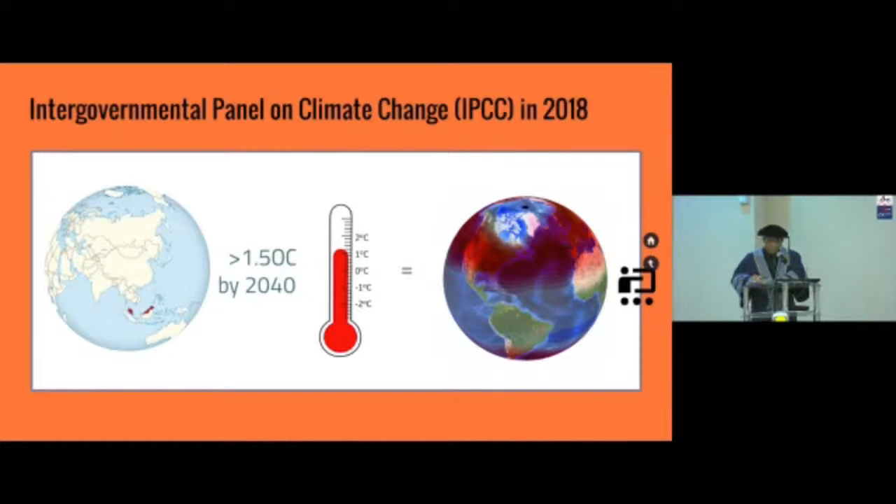That is why the Intergovernmental Panel on Climate Change, IPCC, in 2018, with 90 climate scientists from 40 countries over the world, concluded that global warming must be limited to 1.5 degrees Celsius by 2040. If not, we will face devastating effects, especially on temperature rise.

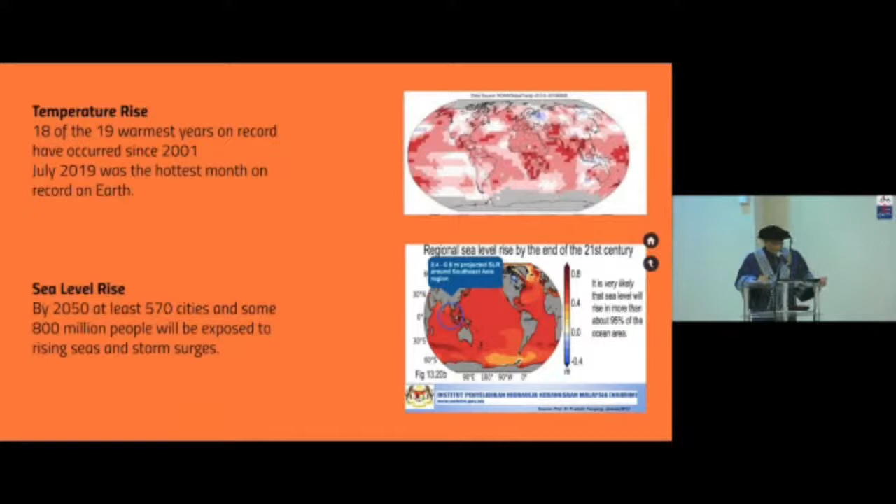When the temperature rises, the water will expand and sea level will rise. We will face extreme weather, and we will have lots of climate migrants. Of course, this contributes to poor health.

Because of heat exposure and children's undernutrition, we have diseases related to climate change. And then we have water problems.

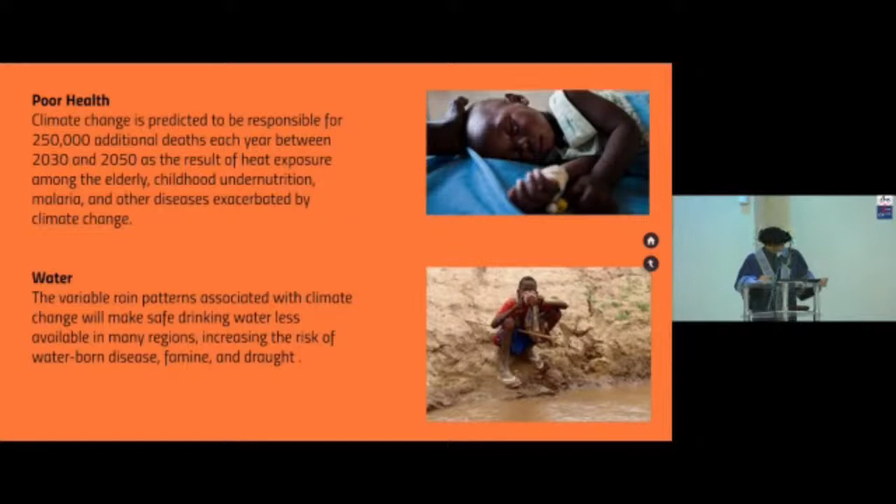Air pollution is a normal phenomenon now, which is why we are trying to promote the use of electric cars. And of course, related to climate change, we see mass extinctions and ecosystem collapse.

Another effect is changing agriculture conditions, because of the heat being generated in some areas. In the past 30 years, developing countries in Southeast Asia, including Malaysia, have witnessed the biggest number of natural disasters, with more than 90% related to climate disaster.

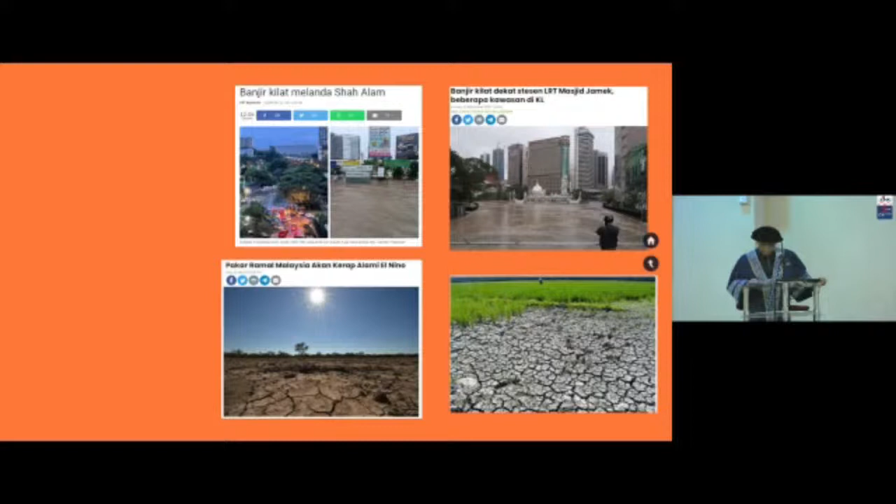In Malaysia, flood incidents have increased over the past 20 years, with losses exceeding 8 billion ringgit. We have had floods recently. The effects are felt by all people, but most severely by the underprivileged, low-income families, and farmers.

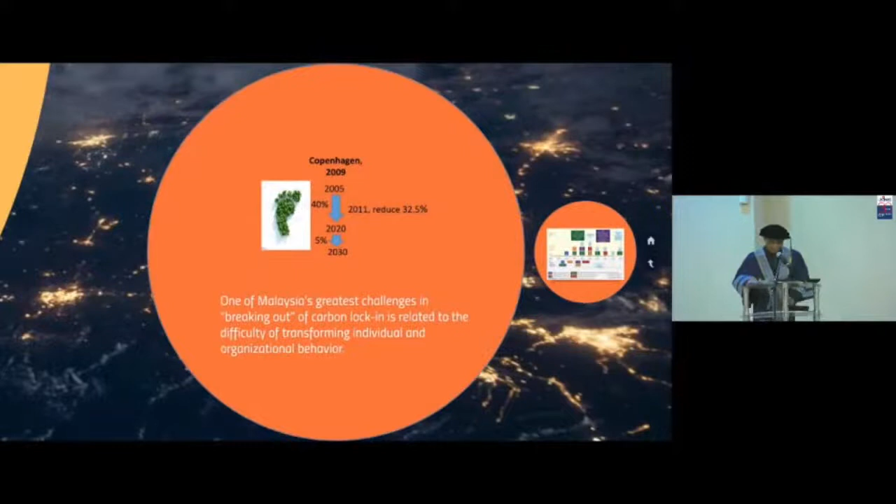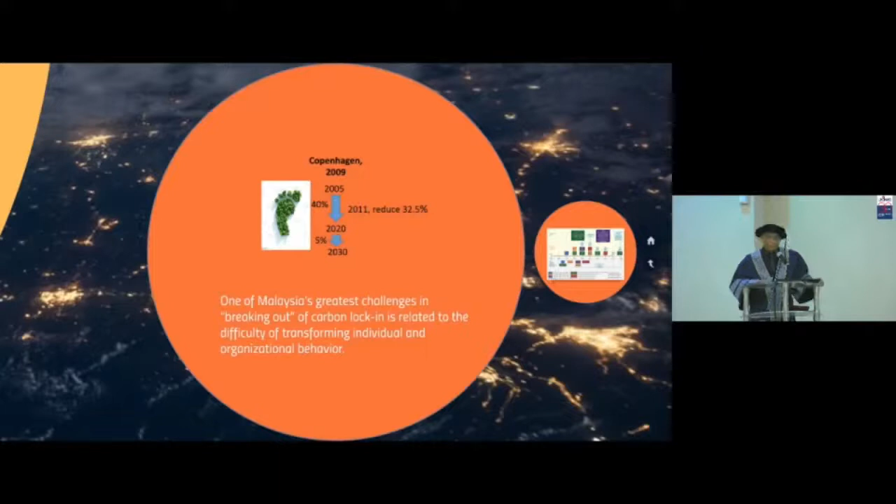So what is Malaysia's action plan in handling this? In 2009, our 6th Prime Minister, at the United Nations Climate Change Conference in Copenhagen, promised to reduce carbon footprint emissions by 40% by 2020 compared to 2005 levels, and later a further 45% by 2030 compared to 2005 levels. Now it is 2022 - what happened by 2020? Did we achieve that 40% carbon reduction?

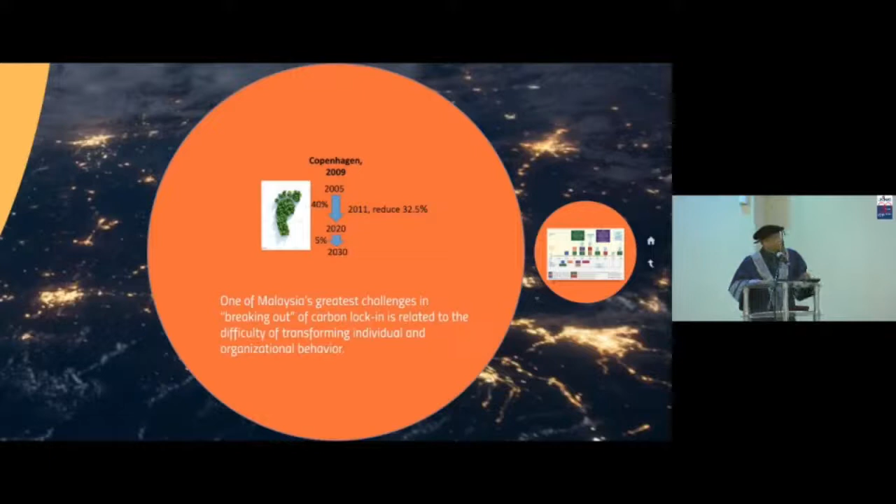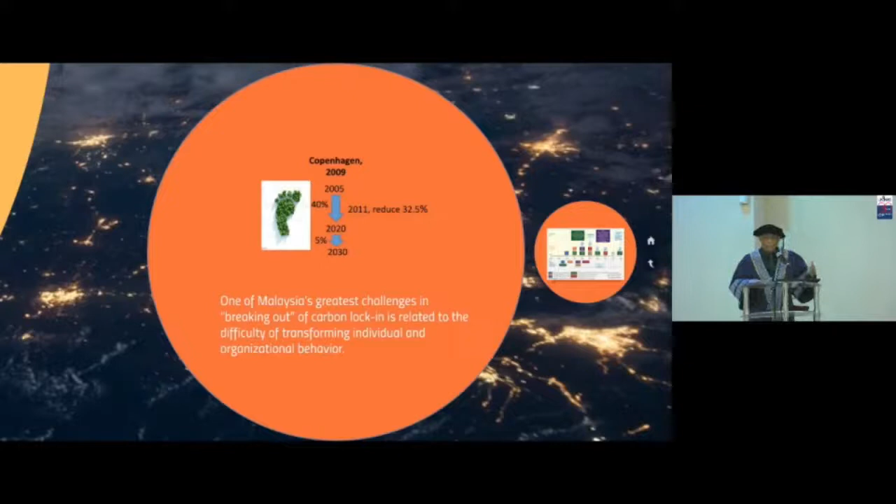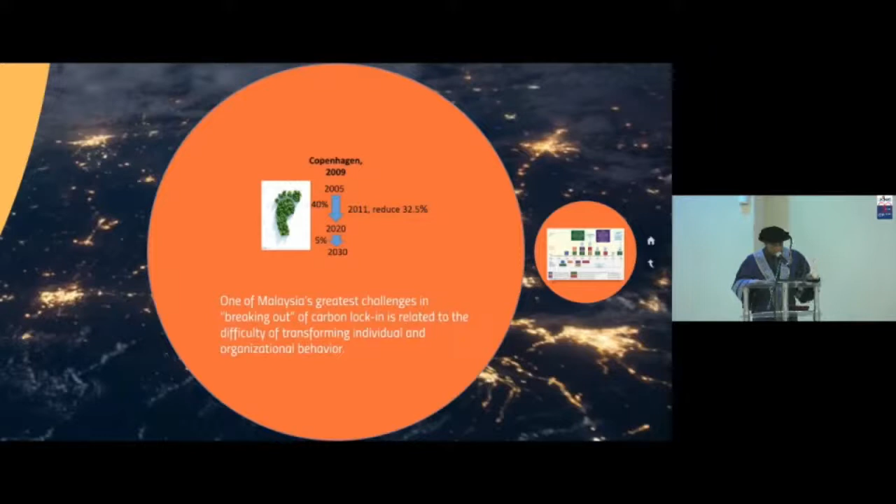One study found that by 2011, we managed to reduce 32.5% of our carbon footprint. After that, they had problems getting the information. So one of Malaysia's greatest challenges in breaking the carbon lock-in is related to, number one, difficulty in transforming individual behavior, and number two, organizational behavior. We have problems changing that.

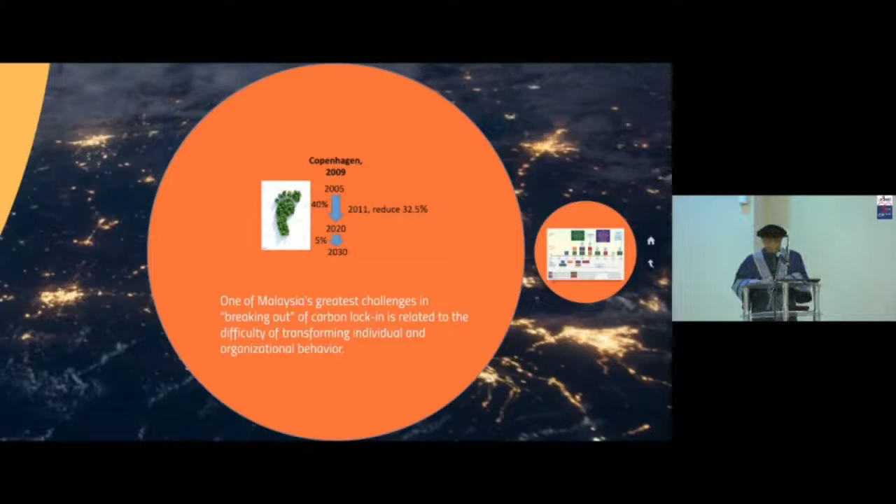Malaysia made green technology a mainstream ministerial portfolio in 2009, followed by the launch of the National Green Technology Policy in 2009, the National Renewable Energy Policy in 2019, and the Generation Development Plan to 2020. We have promised another bold pledge: Malaysia will achieve net zero CO2 emissions by 2050, with 73% of energy production based on renewable energy.

How about Sarawak? What did we do in Sarawak? The Sarawak Post-COVID-19 Development Strategy 2030 was launched in July 2021, specifically to ensure a clean and healthy environment for all, by having policies on sustainable forest management, as well as adopting new technologies and innovations to support Malaysia's commitments.

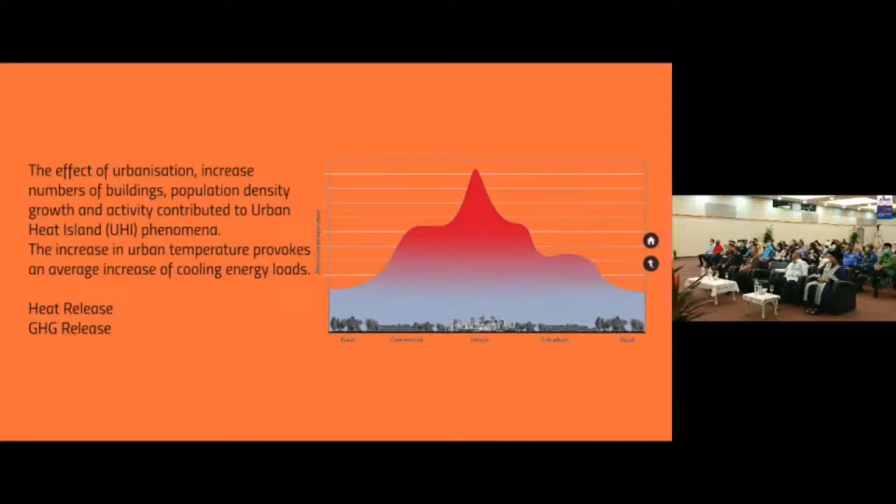I learned this from Prof. Julaihi last time on this one, right? And I keep digging what's the information about urban heat phenomena. So because of heat release and GHG release, the increase in urban temperature provokes an average increase of cooling energy load.

Okay, SDG related to green building that I'm trying to elevate, the name green building, right? Actually, green building or green office, they comply to SDG goals. It's 9 SDGs out of 17 SDGs. Okay, 9 of them comply within the needs of green buildings.

SDG goal number 3, good health and well-being. SDG goal number 7, affordable and clean energy. Green Office complies to goal number 8, decent work and economic growth. It complies to goal number 9, industry, innovation and infrastructure.

SDG number 11, sustainable cities and communities. SDG goal number 12, responsible consumption and production. SDG number 13, climate action. SDG number 15, life on land, because it enhances biodiversity, it saves water resources, it protects forests. And also the last one, it complies to SDG number 17, partnerships for the goals.

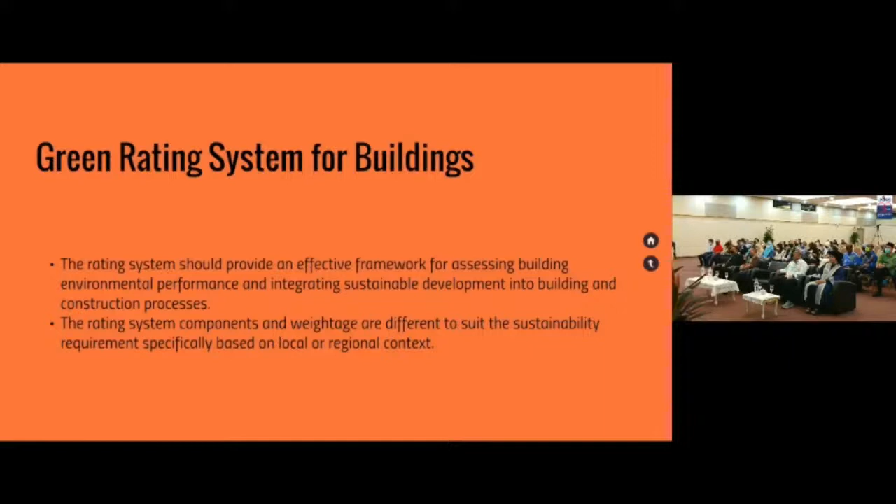Okay, when we have sustainable building, we have green building. Of course there should be a yardstick to measure whether the building is green enough or sustainable enough. So the yardstick, the rating system components, and the weightage are different to suit the sustainability requirement, specifically based on local and regional context. So one measurement cannot fit all. It's different between regions.

Okay, Malaysia. Within our regions, we have a few yardsticks to measure green buildings. We have the first one, Green Building Index, first developed in 2009. Later, Malaysian Carbon Reduction and Environmental Sustainability Tool, or they call it MyCREST, to measure whether the buildings is green or not. After that, you have Green Real Estate, or Green RE. And Melaka also has one, Melaka Green Seal. JKR, they have Penarafan Hijau JKR.

All of these are looking at almost the same components. They look into project planning and management. They look at site planning and management, transportation, water efficiency, energy efficiency - that's my topic, energy efficiency - material and resources, waste, indoor environmental quality, and innovation. They look into these sectors, right?

But we're going to use Green Building Index when we compare with other green building tools. Why Green Building Index?

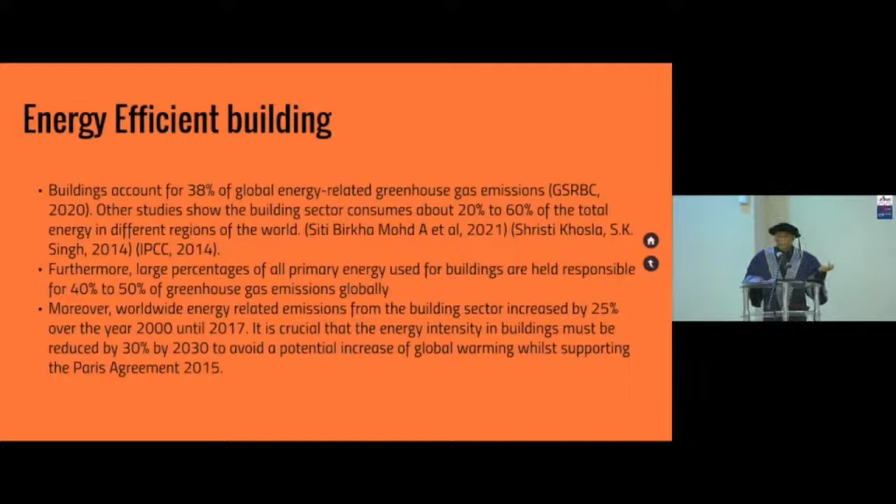The problem with energy inefficient buildings is energy and gas emissions - both are related to climate change. Let's see the climate of Malaysia - how are we going to relate our building to the climate of Malaysia?

For Malaysia, the average sunlight per day is 4 to 8 hours, with a lot of clouds. The highest day temperature of the year is 33 degrees Celsius, the lowest day temperature is 29 degrees Celsius - a fluctuation of just 4 degrees Celsius. At night it's also 4 degrees Celsius difference, 23 to 20 degrees Celsius. But we have high humidity.

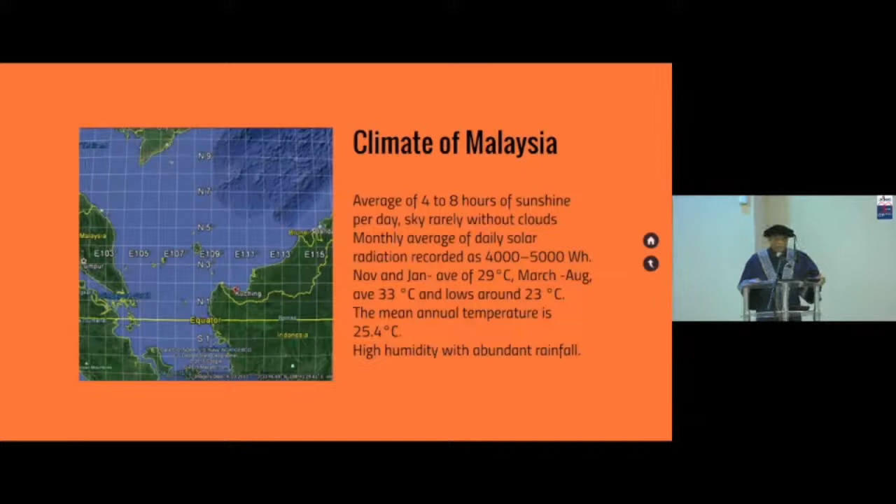High humidity contributes something to the energy efficient building calculation. For thermal comfort, MS 1525 in 2019 recommends for a working environment the temperature should be around 23 to 26 degrees Celsius. That is why government buildings at the moment advise setting the temperature inside a building at 24 degrees Celsius. The acceptable air velocity should be in the region of 0.15 to 0.5 meter per second.

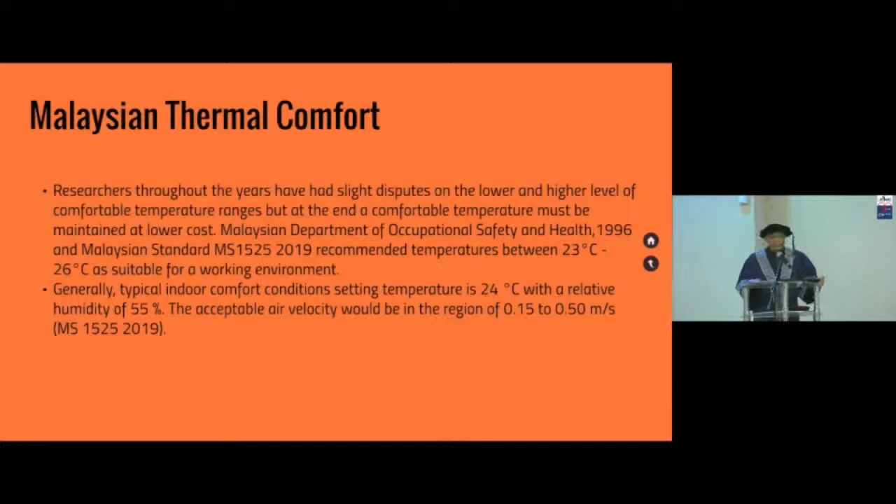0.5 meter per second is about 1.8 kilometer per hour - very small, very slight. The speed is not really there, just a draft.

To strategize for energy efficient buildings: for cold climate, a good building should have good envelope insulation. Envelope means the covering around the building - the external wall, the roof, the foundations, building shape, increasing the air tightness. Make sure the building is tight enough, but not to create sick building syndrome. In tropical climates, light structures with proper building orientation, roof insulation, solar shading, double glazing will have potential to reduce energy usage a lot.

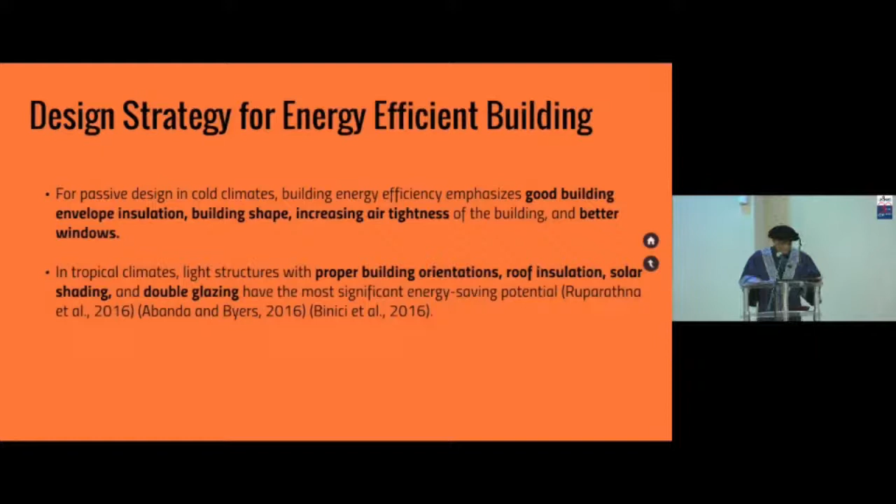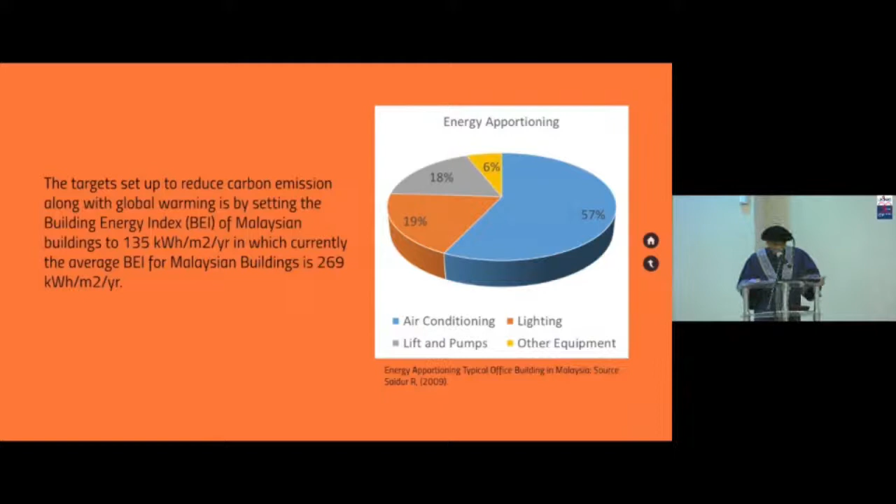In air-conditioned buildings, most of the energy used is for air conditioning. The second largest is lighting. The third largest energy usage in buildings is for pumps and lifts, if you have a lift. The last one is other office equipment. Air conditioning is for comfort, to get thermal comfort, to set the temperature within that range.

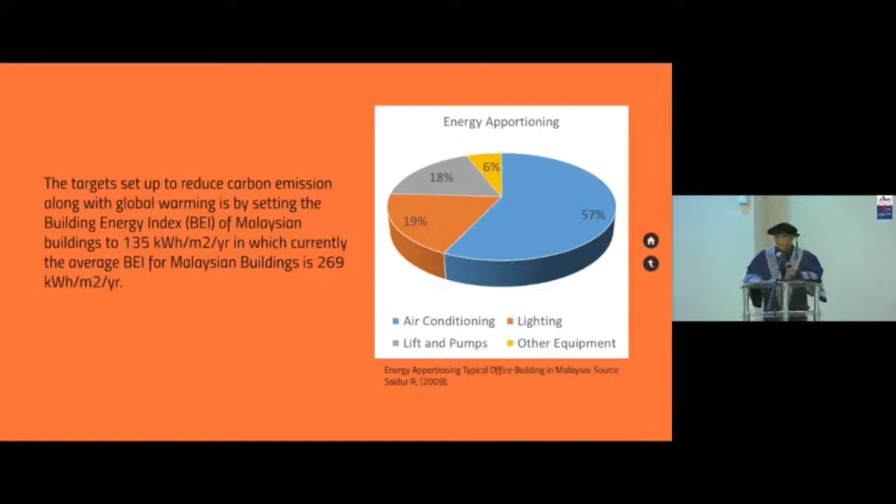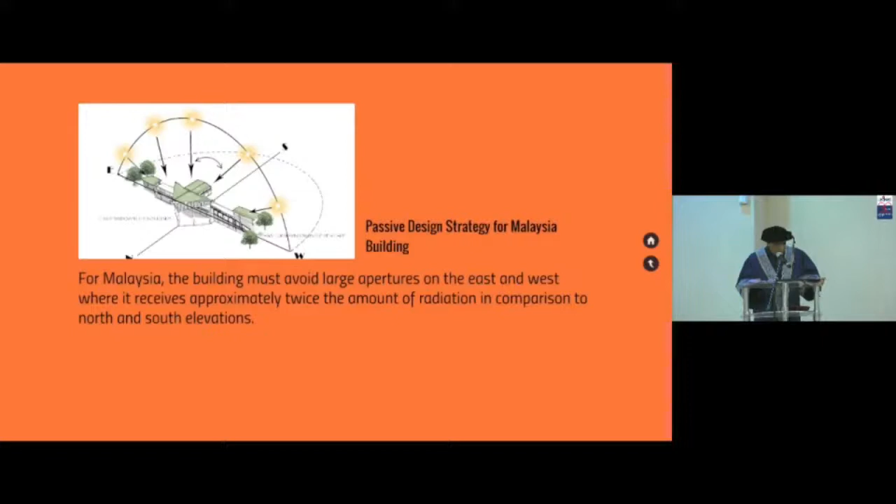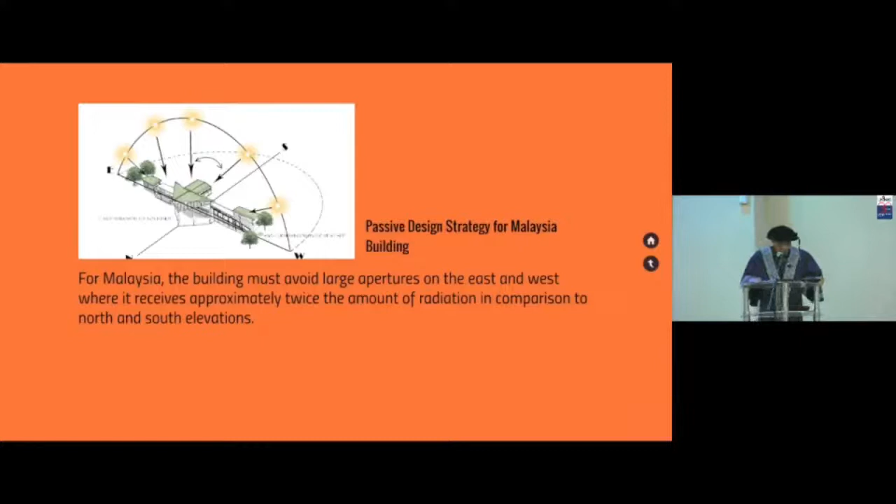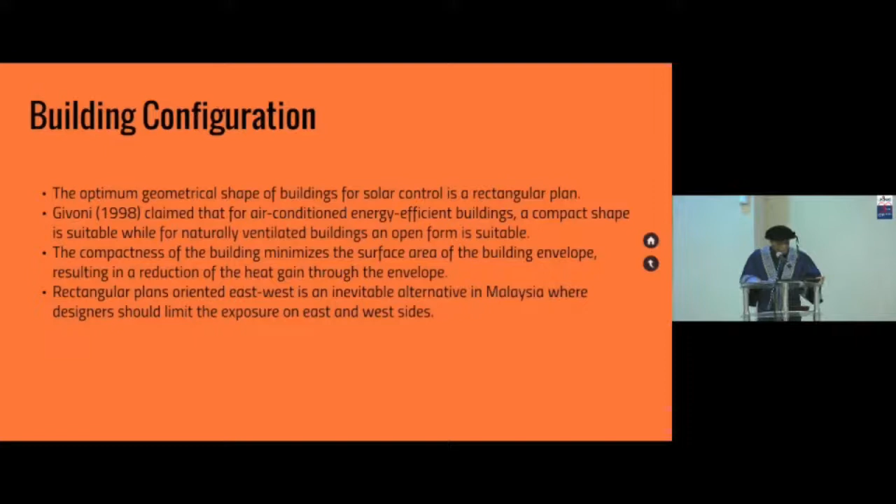So the passive design strategy for Malaysian buildings - we have to avoid large apertures on the east and west, where they receive approximately twice the amount of radiation compared to north and south elevations. For building configurations, it's better to have rectangular buildings. The compactness of a building minimizes the surface area of the building envelope, resulting in reduction of heat gain through the envelope.

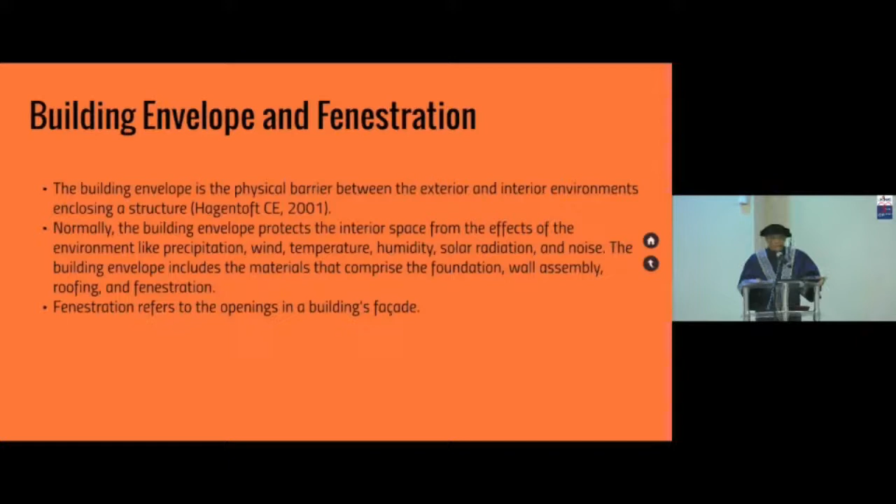Building envelope and fenestration. Fenestration is what I call openings in the building facades, such as glass windows and other openings.

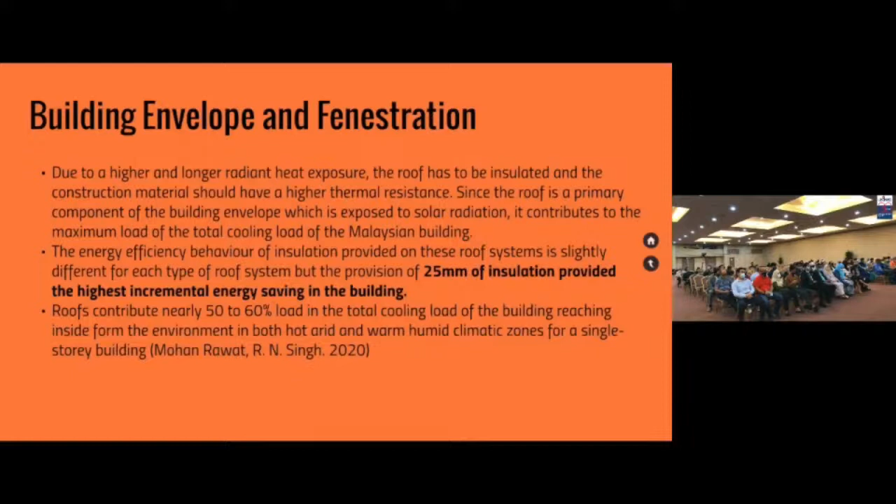Roof, due to higher and longer radiant heat exposure, has to be insulated, and the construction material should have higher thermal resistance. When we talk about insulation in detail, we discuss U value (heat transfer coefficient), R value (material's ability to resist heat transfer), and Y value (thermal admittance), but we're not going to go into that detail.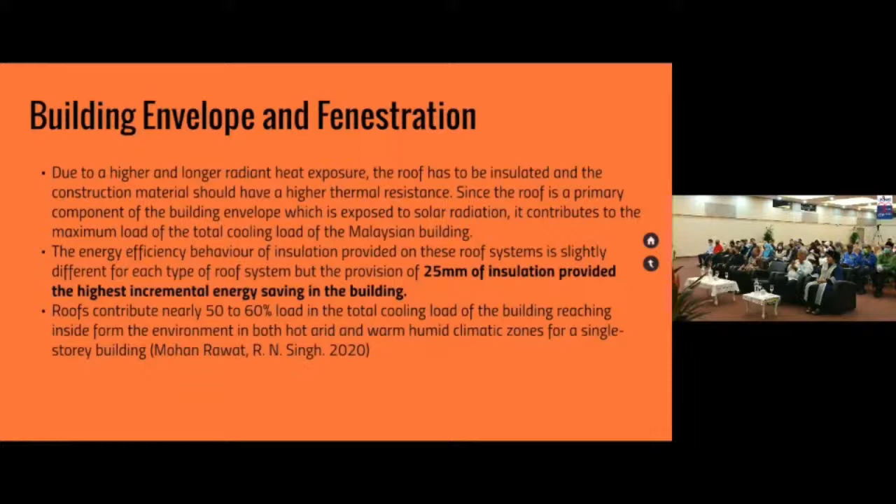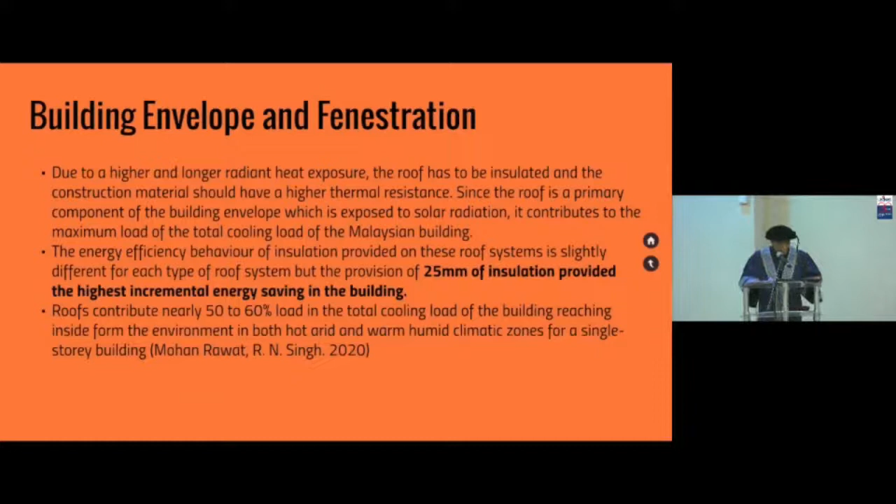The findings show the energy efficiency behavior of insulation in a roof. We have three types of roof. If we have 25 millimeters of insulation, it will help the most, if we calculate the return on investment. Sometimes we pay more but get less effect on energy reduction to run the building. For a single-story building, the roof contributes nearly 50 to 60% of the total cooling load.

There are three types of roof normally used in Malaysian construction: concrete flat roof, lightweight pitch roof with plaster board ceiling, and lightweight pitch roof with concrete ceiling.

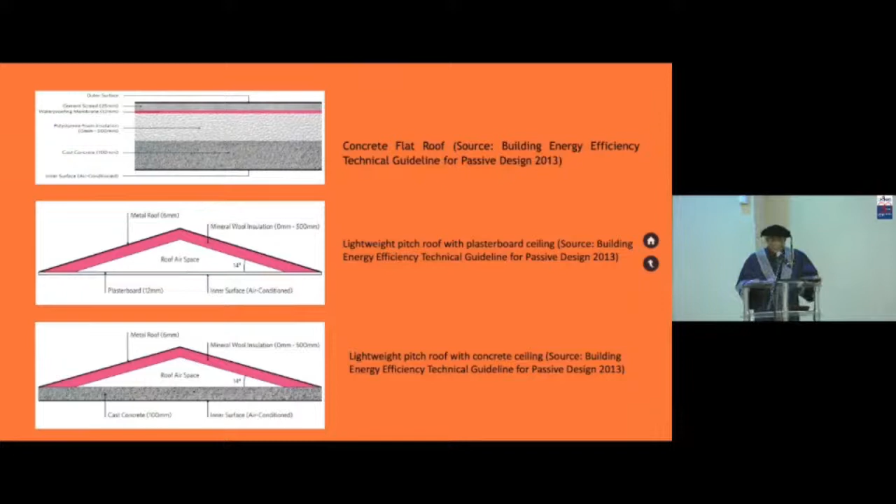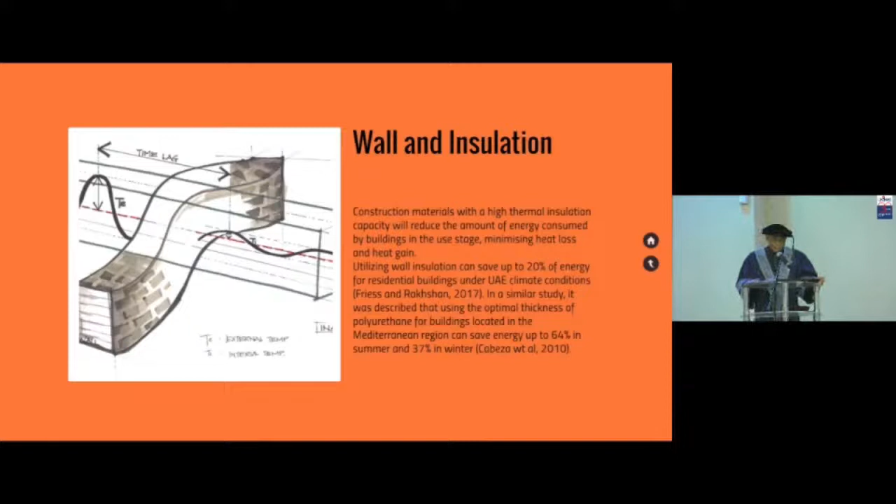For wall insulation, if we have proper insulation of the wall, we can reduce 20% or more of the cooling load energy in the building. The recommended thickness of insulation for perlite is 60 millimeters, for fiberglass is 20 millimeters, and for rock wool is 100 millimeters.

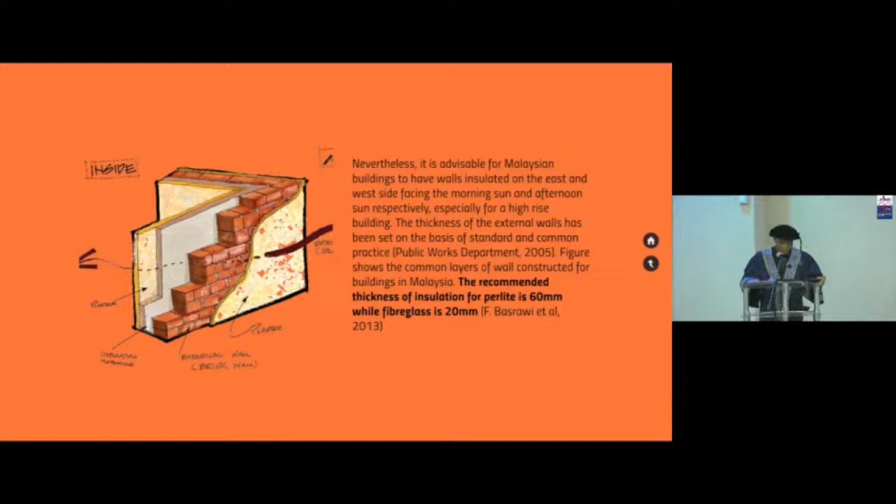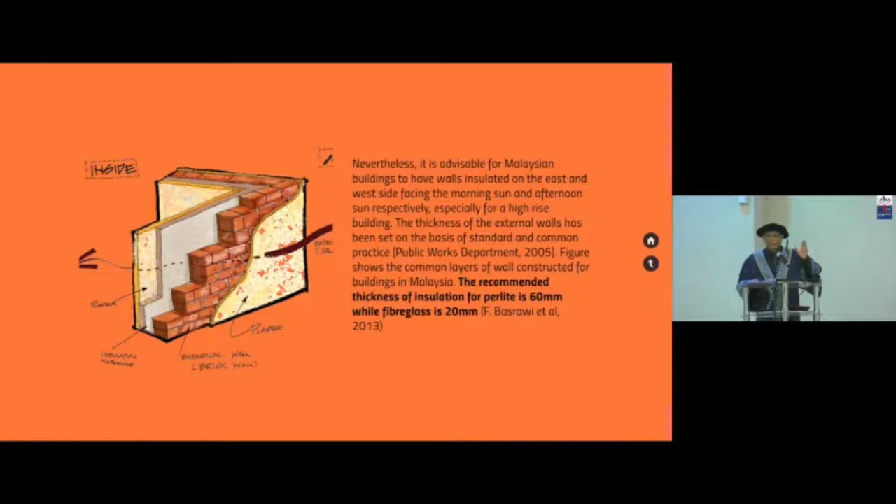But for Malaysian conditions, we don't need to insulate all the external walls. It is advisable to have walls insulated on the east and west sides, facing the morning sun and afternoon sun respectively. Kalau lah masjid, allow me to speak in Malay a bit - if it's a mosque, because we are facing west, isn't it, the west side is normally hit by direct sunlight. So for the direction of the qibla, we should have insulation there.

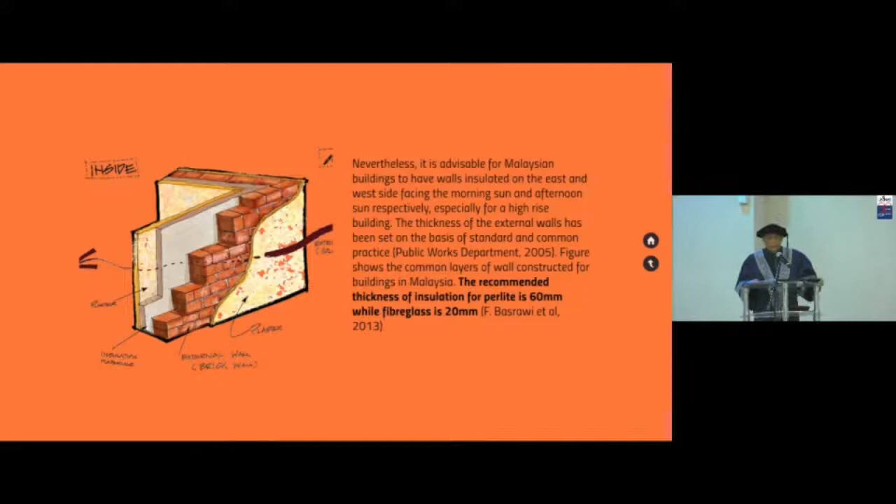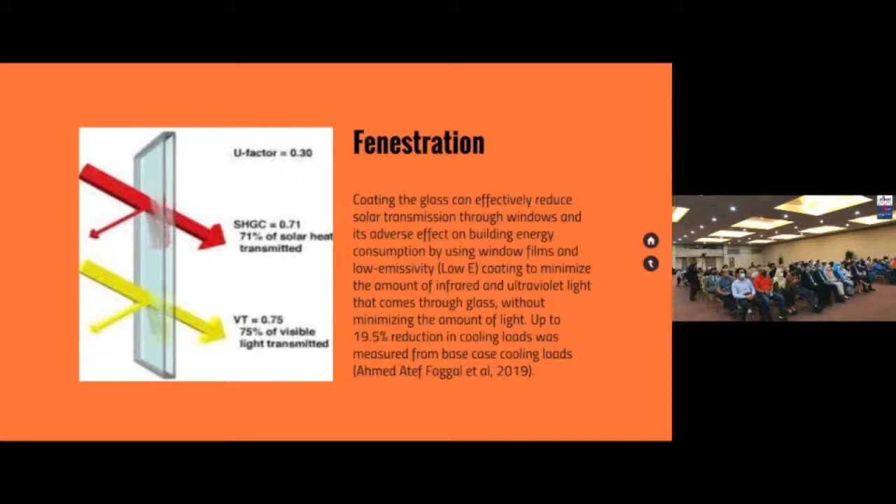For fenestration, glass windows, we have a few technologies: double glazing, triple glazing, single glazing, and low-E glazing. With the right component of glazing, we might reduce energy usage by 20% or more.

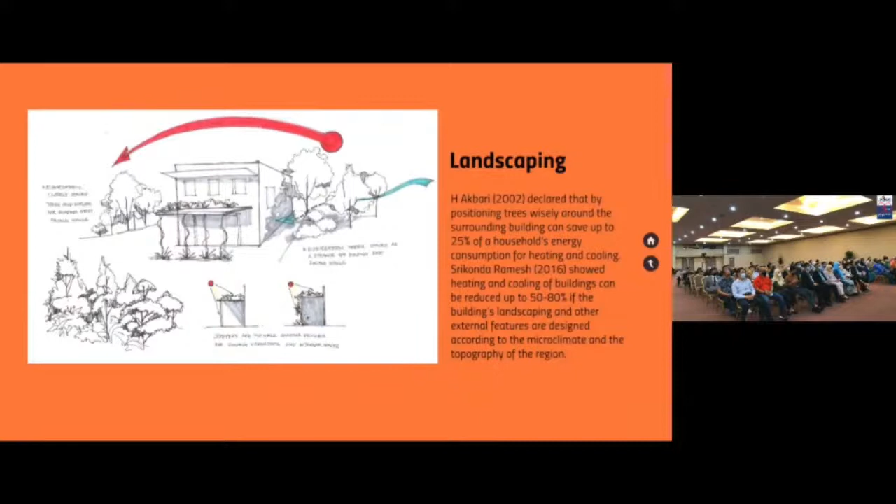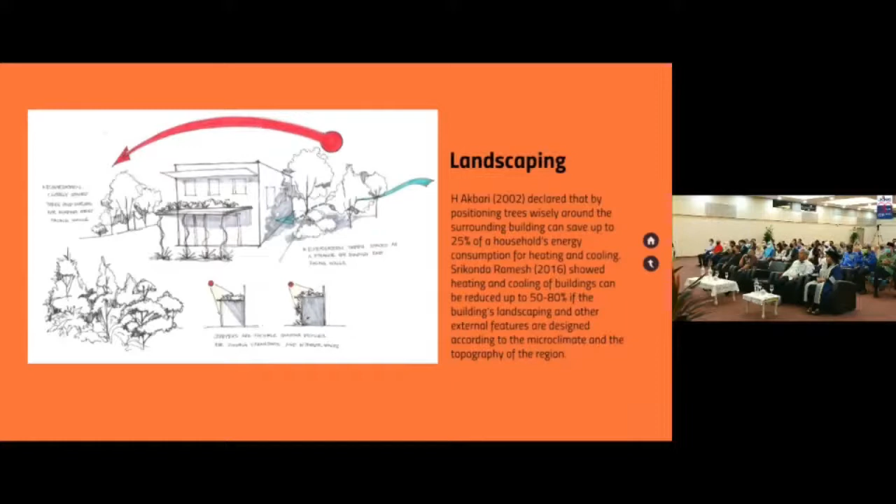Landscaping is another component for passive design. If properly landscaped, the landscape shadows the direct heat from sunlight to the window, which definitely reduces the energy needed for cooling the building.

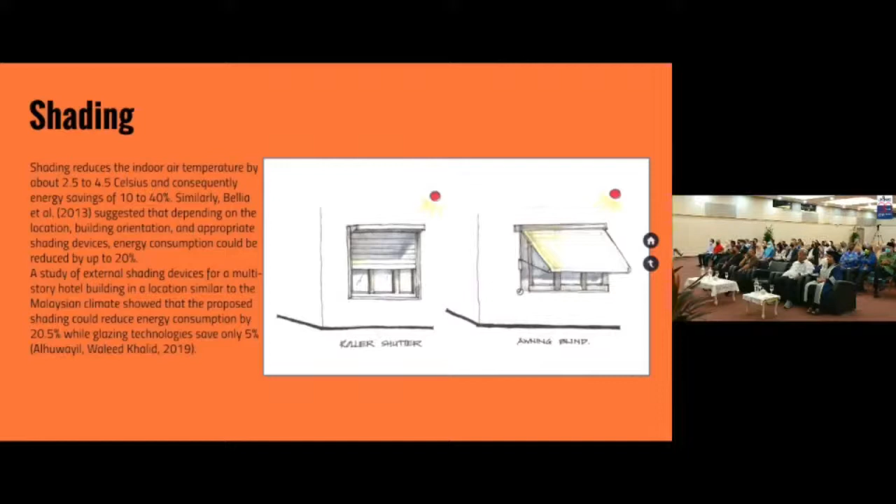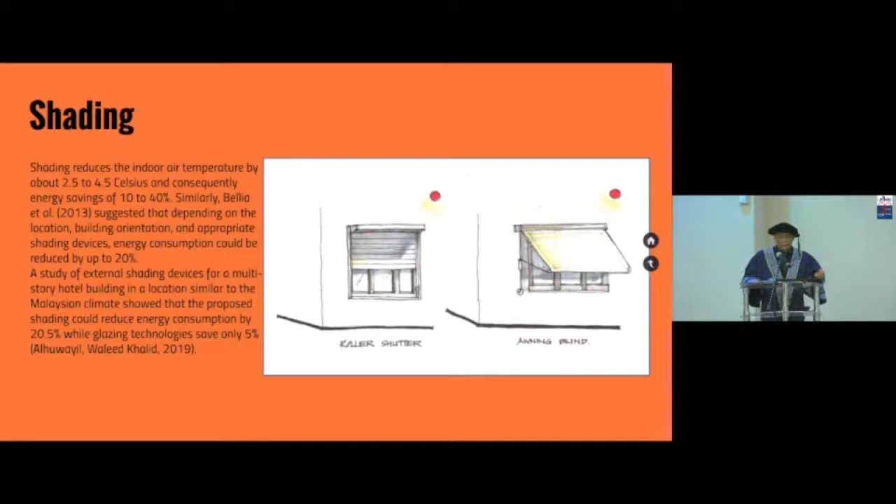Shading, shade by overhang - we have internal shading and external shading. External shading is better than internal shading because you stop the direct sunlight through the wall or glass window, rather than trapping it inside first and trying to regulate the heat within the building. We stop it before it enters the building.

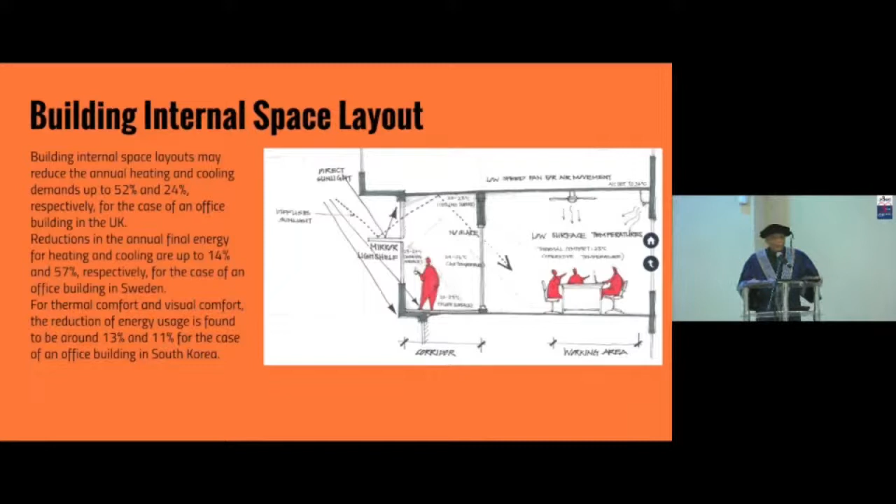There is another factor about internal space layout. Some studies have shown it's better to arrange your internal layout between working area and corridor area. The working area needs a more comfortable environment with lower temperature, whereas the corridor, since the air outside without direct sunlight or radiant heat is already okay - the air temperature outside being 28, 27 degrees - is fine.

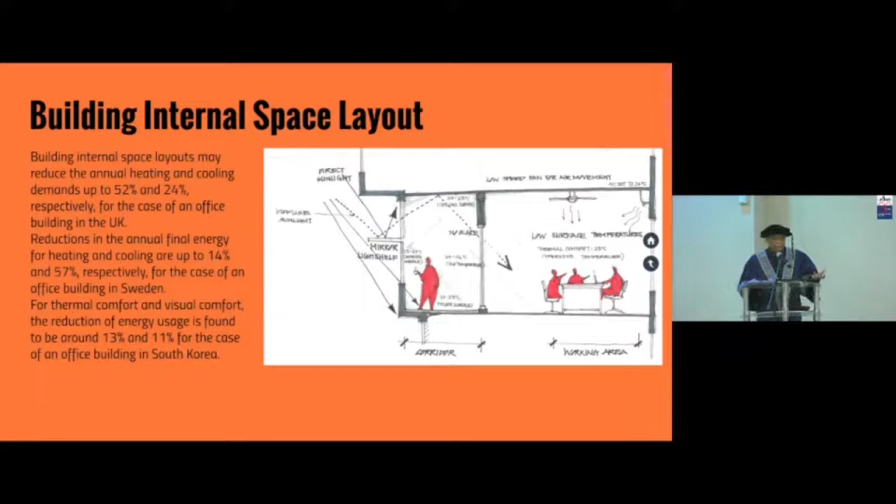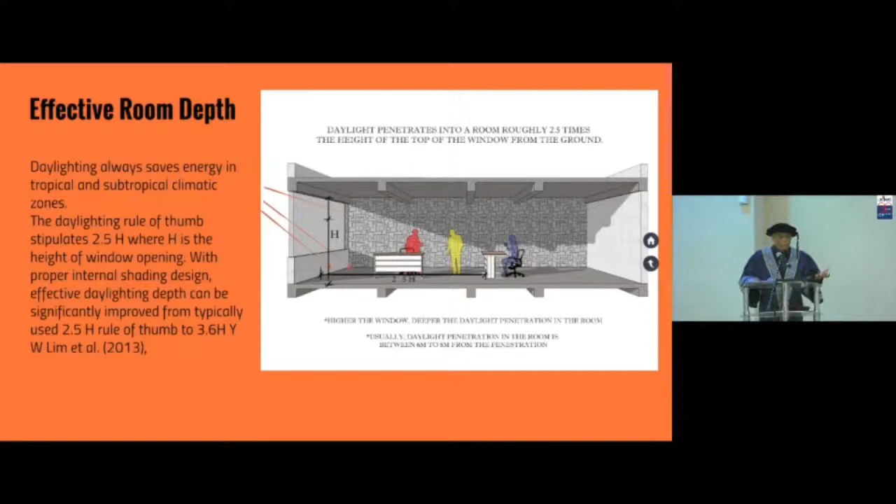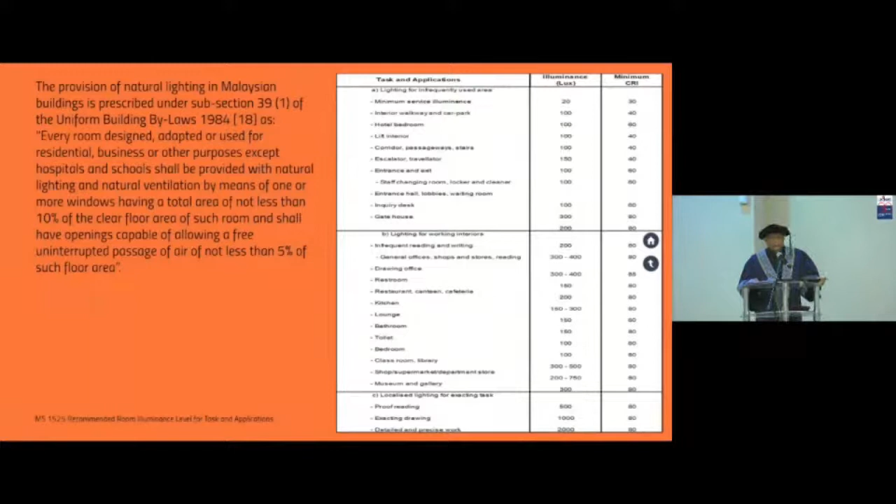When we design the effective room depth to get better daylight, because in a tropical country we need daylight to help light the area where we're working. According to UBBL, for illuminance level, if we're in a classroom, we need 300 to 500 lux. Kalau kat tandas - if it's a toilet, we just need 100 lux. Not much to see there, right?

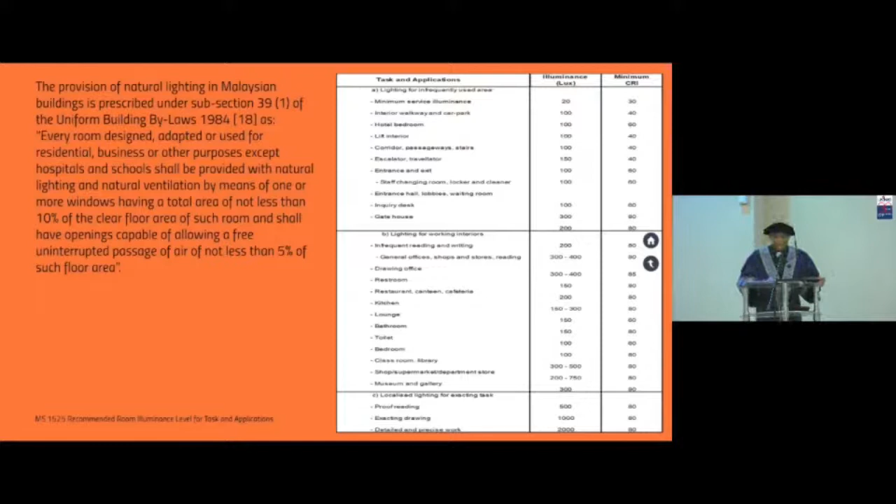This is important for us because in Malaysia, buildings have a lot of air outside penetrating inside as hot air, and cold air exfiltrating outside too. Whereas for fresh air requirement, we only need 0.5 air changes per hour, based on an occupant density of 10 square meters per person, to maintain good air quality in the building.

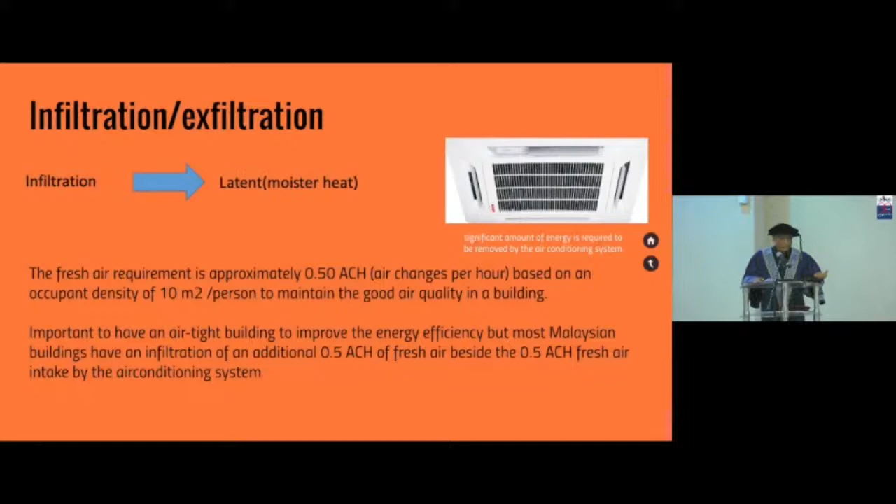But if we have air leakage already, the infiltration will give an additional 0.5 air changes per hour. Okay. So, active design strategy for Malaysian buildings. Just now I talked about passive. For active design in these buildings, a normal comfortable room temperature should be set between 24 to 27. Normally 24 is better. And the acceptable air velocity is around 0.15 to 0.5 meter per second.

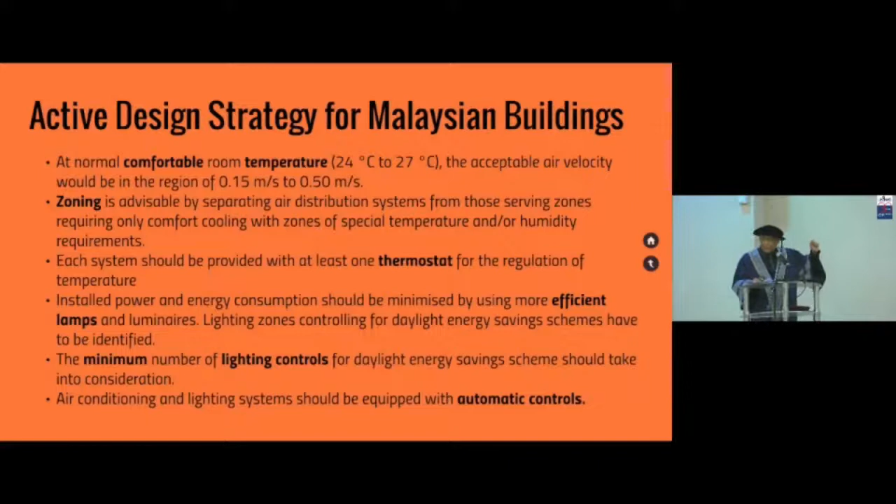And we are advised to have zoning for our electricity. Each system should be provided with at least one thermostat. Installed power and energy consumption should be minimized by using more efficient lamps and luminaires. The minimum number of lighting controls for daylight is important. And also we have to have automatic control, because with the air conditioning in our office, sometimes we forget to switch it off, right?

So I'll try to sum up all of what I'm saying, right? An energy efficient building will definitely minimize conduction, convection, and radiation of heat penetrating into a building, especially in Malaysia. Better design of the building envelope, controlling the air tightness, and having energy efficient indoor equipment are the keys to success for efficiency in a building. Okay.

So as Malaysia's economy has grown rapidly, new buildings and new towns have emerged dramatically. So we need to have sustainable and green buildings to maintain or promote smart and sustainable cities. We look into the buildings that surround us.

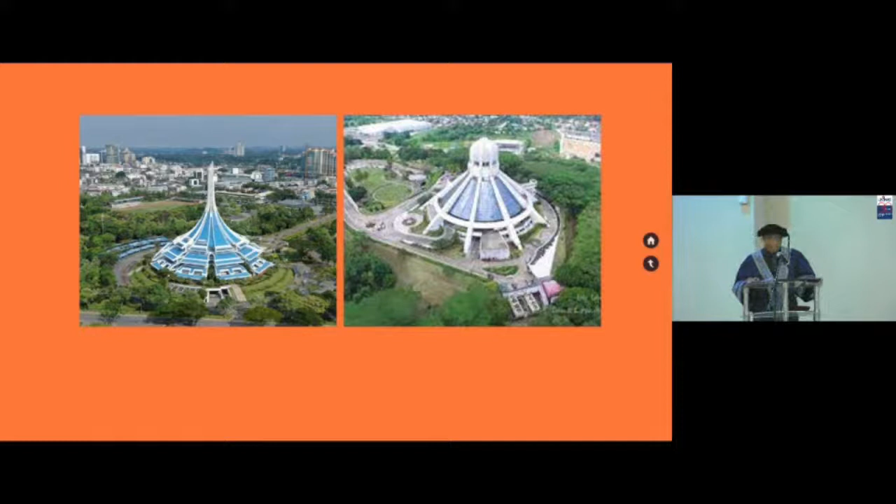We look at our place in Kuching. All right, buildings in Kuching. We have MBKS. We have DBKU, the glass is facing the sky. MBKS, the window glass is being blocked; they have overhangs. We have Bank Negara, which I talked about, and we have DUN. We have Mahkamah Syariah, an inverted pyramid.

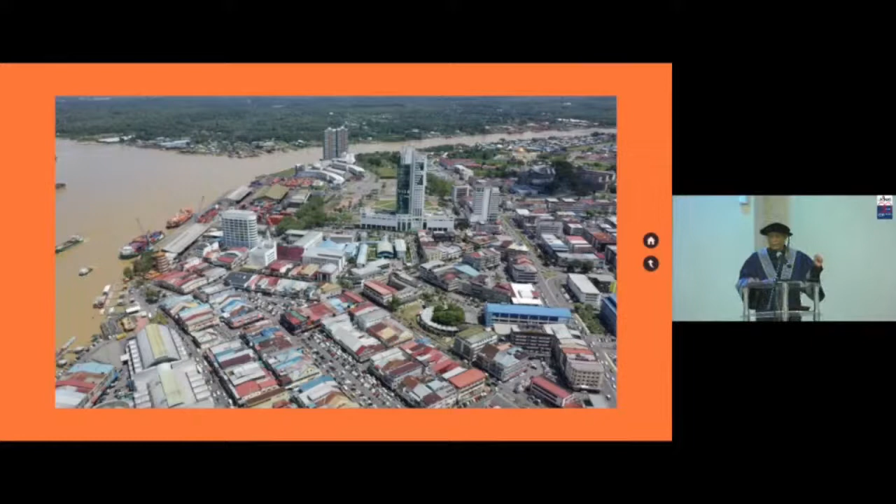Okay, we talk about smart cities. We are aiming to have 38 cities in Sarawak be smart. This one is a town; one day it will become a city, right? Do we have energy efficient buildings there? Do we need to have more energy efficient buildings? Okay, this is Sibu. So, yeah. I keep wondering whether we can achieve 38 smart cities in Sarawak.

I hope everybody will support the government to have these 38 smart cities in Sarawak.